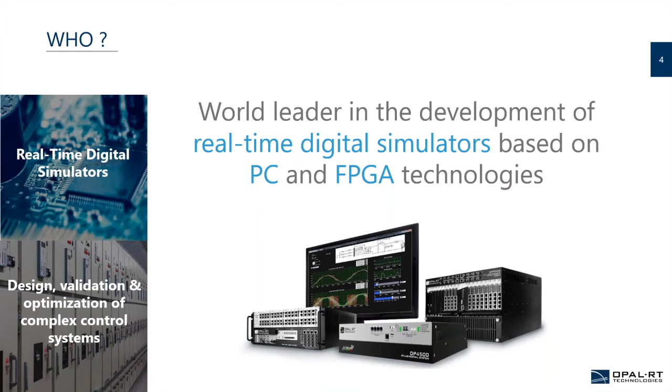Well, OPAL-RT Technologies is currently the world leader in the development of real-time digital simulators, which are based on PC and FPGA technologies. They are used to design, validate, and optimize complex control systems. And the systems that we develop scale up from compact simulators, as the ones we can see in the bottom right-hand corner, to large integrated test benches, which offer extra services such as mapping and harnessing and specific electronic conditioning.

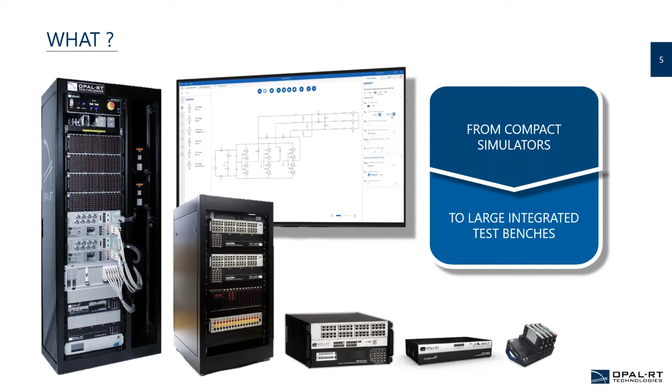Obviously, not only do we manufacture hardware, but as well software that goes with it, which is used to design the models that we want to study. And in this case, we are speaking about microgrid models. So it's the power system part, but as well whatever power electronics and control that goes with it. So what we do here is provide systems which allow to simulate both control and physical models.

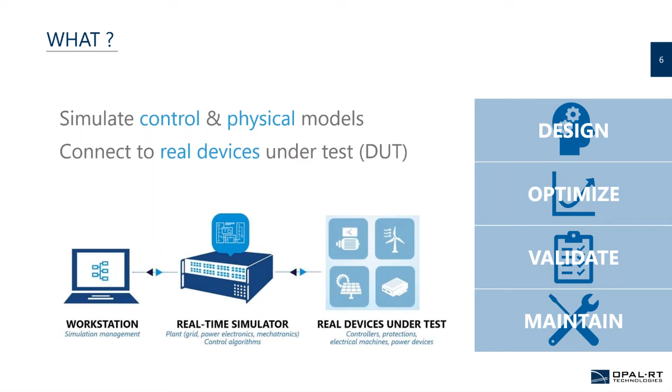And at some point, we would like to connect these simulations to real physical devices under test. The fashion in which we do this will define whether it's a controller hardware in the loop or a rapid control prototyping approach. So this will be seen later. But basically, the idea is that we have something that is simulated, something that is real, and we want them to talk together. And depending on how we connect them together, we will be able to somehow ease the design or optimize the configuration, validate complex systems, including controls, and maintain these systems even if they are already on the field. So why would we do such things? What are the use cases that we can find when using such real-time simulators?

Well, different cases here. So if we just speak about the energy world and the power systems world, including the microgrids, there are three main topics: the control system testing, system level studies, and protections. If we start from the one in the middle, the system level studies, the challenge that could be brought by such complex systems is that we need to analyze them in a very detailed way. We need to check what happens if there are faulty cases, what happens with cybersecurity, what happens with renewables integration, and generally speaking how to deal with fast power electronic devices.

We have to deal as well with the development of the control systems. So we need to debug all these complex algorithms and the smart things that we try to define here. We need to test the controllers and try to do this as fast as possible, because as you all know, projects are time limited, budget limited, so the faster the better.

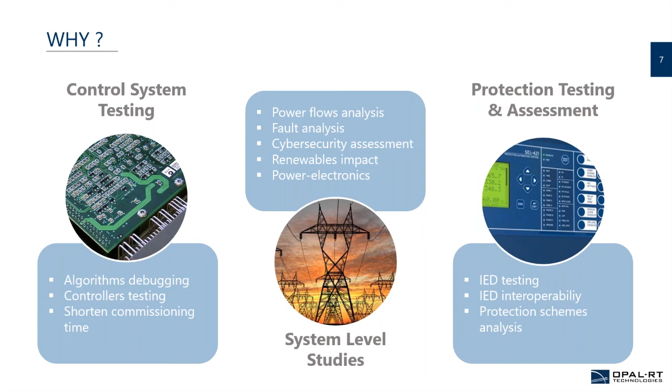And in the end, protection, that's as well a trendy topic, where we need to test IEDs, the intelligent electronic devices which are on the field. We need to check if they operate together, if different vendors manufacture systems that can work together. And generally speaking, we want to analyze protection schemes.

So OPAL-RT, we have 7 offices all around the world, 280 employees, and more than 100 customers. So we try to cover the whole world and offer service as close as possible to our customers. Our customers include power systems, power electronics, aerospace, automotive, and other transportation sectors, in both industrial and academic fashion. So we work with industries and as well with universities and research labs. Well, that was about OPAL-RT.

Let's talk now about the challenges that we have to face when we are trying to develop microgrids. There are different kinds of challenges. I would like to introduce 3 big topics: the technical challenges, economical, and regulatory. So technically speaking, when we are trying to design a microgrid and the controls that go with it, we'll need to take care about different sets of operations.

So the on-grid or off-grid operation, we might want to study what happens if we need to black start. Do we have grid forming capabilities in the microgrid? We need to balance the power, obviously. We need to define protection schemes. We need to have power electronics which are properly controlled. We are integrating renewables, and we have to take care as well of interoperability of devices.

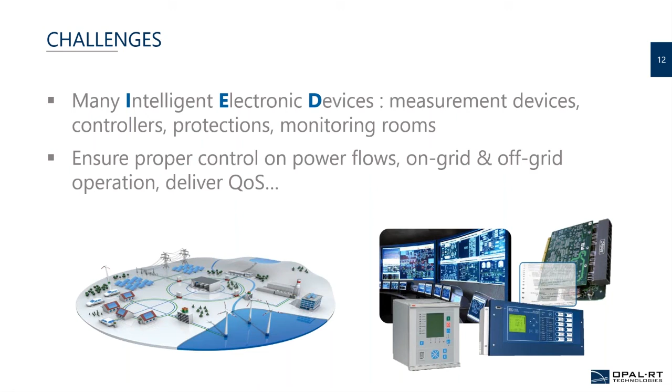We have the challenge around the distributed and intermittent energy resources. So as you know, with intermittent PV or wind turbines, the sun does not shine all the time, neither does the wind blow all the time. So the energy production is not the same all the time along the day or along the year.

So we need to take care as well in terms of controls about this intermittent energy and make sure that it's redirected in the right way to ensure the power balance at any moment.

I mentioned rapidly the interoperability issues that we might face, especially when we have multiple IEDs on the field, which are speaking over different protocols, which come from different vendors, which of course are supposed to comply with standards. But as you know, implementation can slightly differ from standard. So testing the interoperability of IEDs is a challenge, and it needs to be addressed at the same level as all other challenges, which can be electrical or control based.

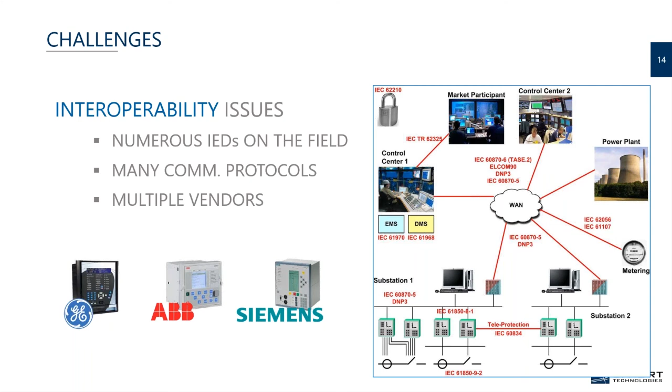Now the question is, well, why don't we just build it and test on the field? Let's do it and let's see how it works. And if we need to adjust something, well, we will figure out what to do. Well, the issue here is that we have an effect that you might know. That is the cost of, let's say, repairing something when we detect the issue very, very late.

Actually, if a defect is introduced at the design stage, a very early stage of a project, well, the cost to repair it, to fix it, grows exponentially. So the later we detect it, the more expensive the correction will be. And it really grows in a crazy way.

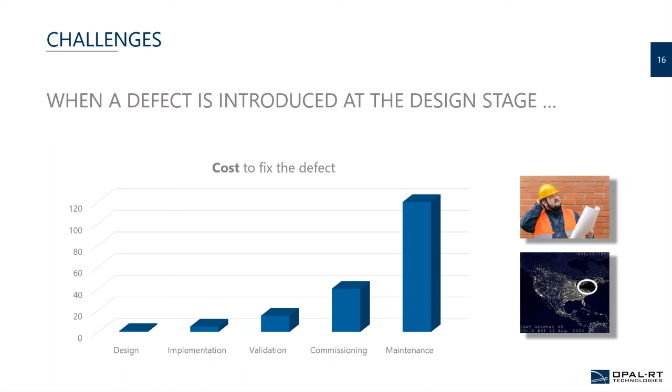So imagine that we have some kind of blackout, things that happen from time to time, and there were some huge ones, especially in the US 15 years ago. Well, we are talking about weeks to restore the power, about billions of dollars to cope with the impacts. So these are things that we don't want to see very often, if possible.

And a principle that is very important to know is that when we try to define in a simple way the different steps of a project, well, the design, implementation, validation, commissioning, maintenance, actually, we usually start detecting issues when we start validating the system, when we start testing. So this is the traditional way.

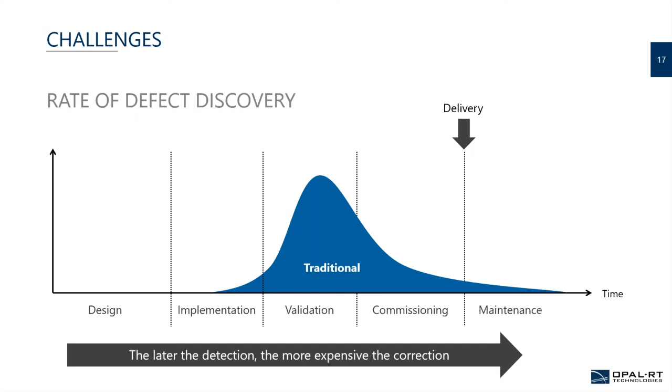So we design, then we implement, and once we have the product or something that looks like a product, we start testing. And this is where we start finding issues. This is not super cool because if we remember the previous slide, if we detect issues very late, the cost to repair them can grow very, very fast. So what we want to avoid is detecting issues very late, but it's what happens many times still today.

Now, why don't we just create a prototype in the lab before we go real and see if it works? Well, first thing is that it's hard to perform full-scale tests because in the end, it would be a real system. So it's as if we deployed it on the field. And if we try to downscale it, well, we can question the representativeness of it. It's time consuming as well to have prototypes, can be very expensive, can be unsafe.

So in the end, in some cases, prototypes are not a super good idea, even though they can help to do some tests, but we cannot rely on them to validate a complete product or a complete set of products, especially when they are super complex.

So why is it hard to have full-scale prototypes or to test on the field? Well, in the case of electrical grids, the question is, okay, how long shall I wait to capture a fault and see if my controls or my protections react properly? What happens if this interrupts service? So what if I'm impacting customers here? So that's a big issue.

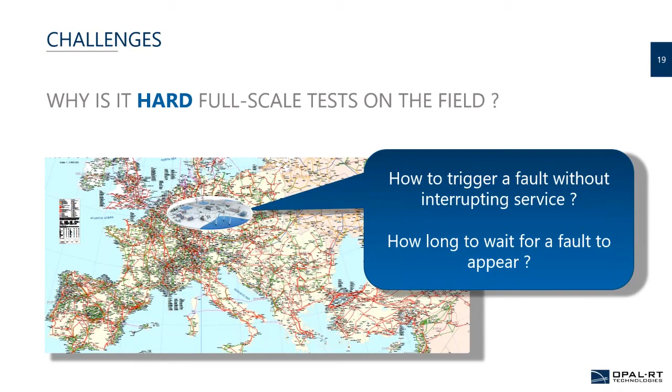So if I'm on the field, there are some tests or some systems I cannot test in real conditions right away. It can be time consuming as well, because if we talk about the control part, the algorithmic part, we have more and more software controlling all these complex systems. And just for your information, a high-end car of today is 100 million lines of code. So imagine if you are deploying hundreds of control systems on the field, and you need to make sure that every single system is working properly. This could take forever to test.

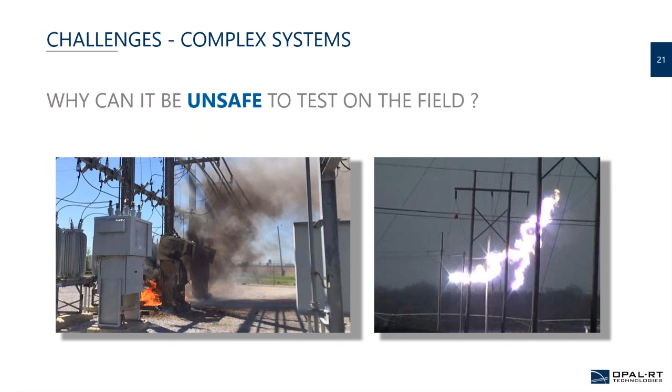It can be unsafe as well to work on real prototypes without being sure of what's going to happen. I think the pictures are telling what I mean here. We don't need to go further. So these are things we don't want to see either. So if I try to sum up things here in terms of challenges: on-field tests, which are hard to conduct, huge validation effort.

Some cases are unsafe to test with real systems. We need to develop as fast as possible, and we need to take care of how much it costs. So in the end, what we want to do anyway is to validate these microgrids and the controls and the protections fully, efficiently, rapidly, economically, and safely. So these are a lot of requirements. We have a lot of constraints.

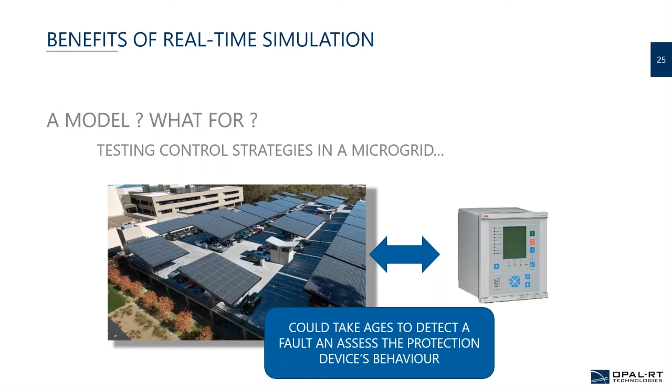And this is why we are introducing the concept of real-time simulation. And I will try to give you some clues about the benefits that can be brought by such simulation systems. So we are talking about modeling. So we are representing in a software way some complex systems that we want to assess. And in this case, it's testing controls and protections in a microgrid. So it could take ages to detect a fault in real life and to assess the behavior.

So what we want to do here is to replace that physical microgrid by a software model that can be very close to reality. And we might want as well to connect this software model with some real devices that are under test, such as protections or controls. And here we can make thousands of runs, and we can trigger whatever case we want very safely.

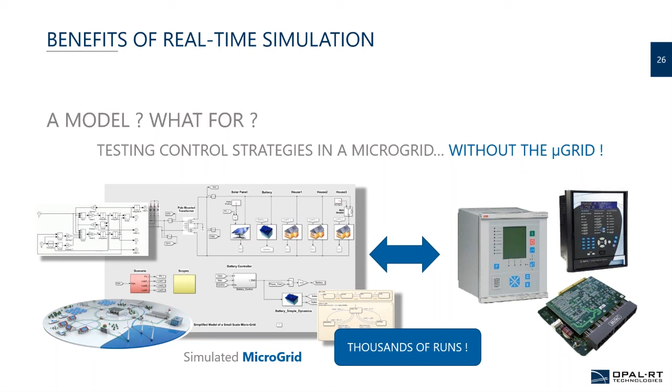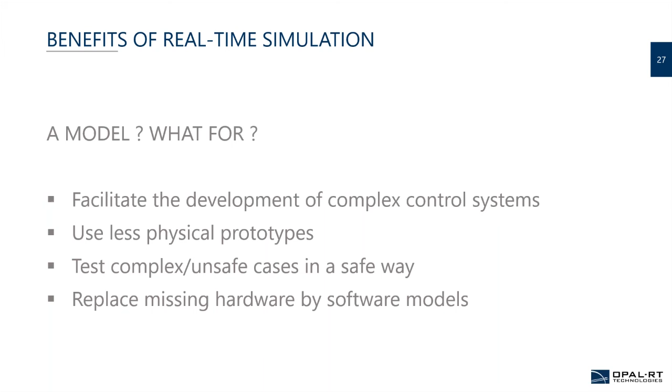So in the end, this modeling approach facilitates the development of these systems. We need less prototypes. We can test very complex or unsafe cases in a safe way, and replace whatever hardware is not really physically available for the tests. So in the end, what we want to do here, in a nutshell, is replace real systems by real-time simulation.

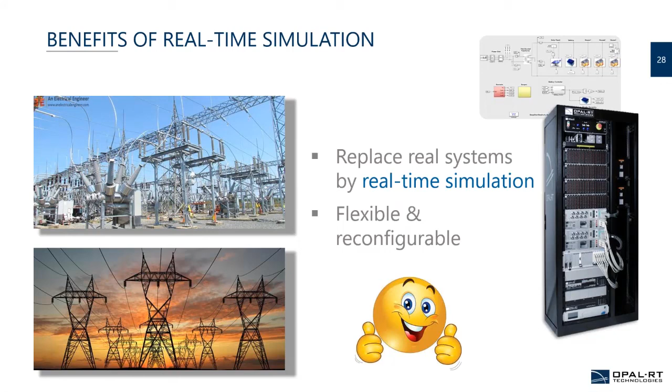So we are creating some kind of digital twins or some kind of virtual representation of the system. And what is nice is that this thing is completely flexible, reconfigurable. You can do super crazy stuff, and it still works. Thanks to this approach, we can start testing the behavior very, very early in the project. So remember the traditional way where we start discovering possible issues at the end of the process?

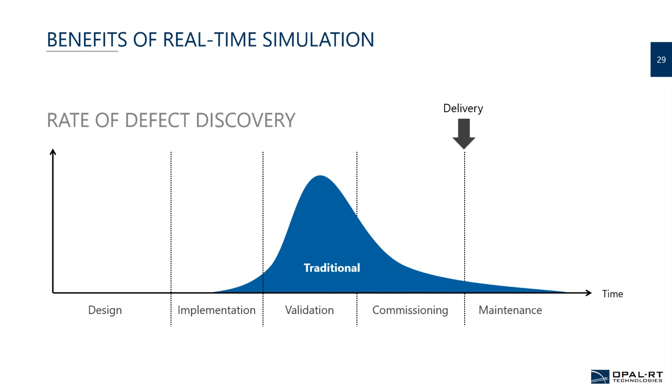Well, thanks to the simulation, we can start discovering things very early at the design stage before we even create any physical prototype or any physical system on the microgrid. Everything is virtual, so we can test whatever case we want, and even before we have any physical things sitting in the lab, we still have these software-based prototypes that can help us to see how things are going and if the strategy we are using to control and protect is working properly.

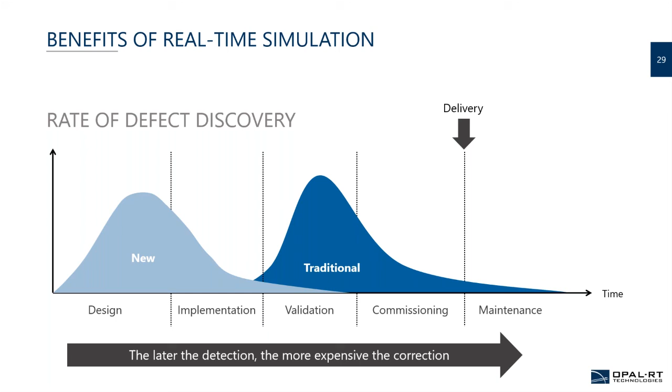So two approaches that we can mention to illustrate what we can do with real-time simulation. We have the model in the loop, which basically means that we want to use software models of the complete system. So the microgrid, whatever it is connected to, such as the distribution grid, and whatever control systems or protection systems that we want. And we can observe the behavior of the system through different test scenarios.

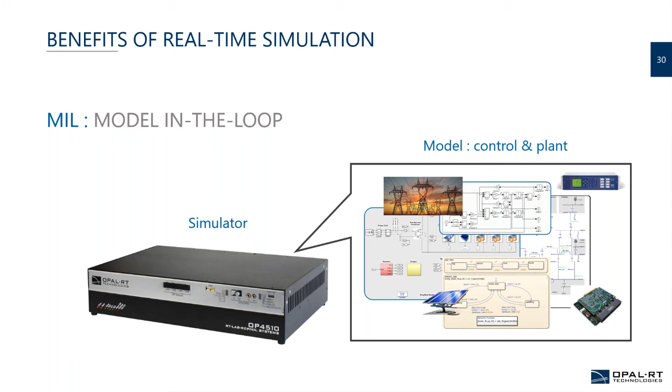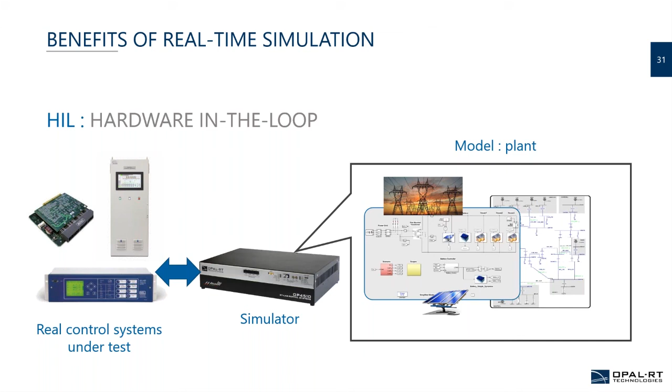So here we are getting a little bit closer to reality because we start having some physical devices connected here. There are other ways that we can think about, such as the power hardware in the loop, where we have part of the microgrid that is real, part of it that is simulated. So we can go very far in the testing and get closer and closer to the final setup that will help us assess that the microgrid will work properly.

So as a conclusion, as you all know, there is a boom today in the development of microgrids. Their development is super challenging, technically, economically, and regulatory-wise. If we just focus on the technical part, we do have tools that facilitate the design, the development, and the optimization of these microgrids. Thank you very much for your attention.